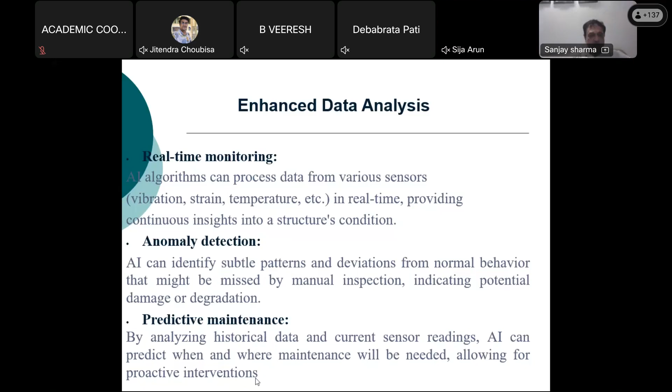So basically what's important is that you collect real-time data, having some mechanism to monitor it regularly. Then anomaly detection means analyzing whatever data is being collected to see what is happening. This is important because if you're carrying out manual inspection, issues may get missed. If we have that pattern coming to us, all that data, we can analyze it, and reduction of that particular cause is important. It will help in planning preventive or predictive maintenance - that is where this particular thing is useful.

So we want that AI tools can recognize complex patterns, how the data acquired is correlated, and how you can use it for accurate assessment of the health of a structure. Human error is always there, so if we get automated data, it minimizes the risk of human error in manual inspection, increasing the reliability of structural health monitoring systems. It also acts as an early warning system - whatever data you're getting, you can use it to get a warning of structure failure.

Then we can optimize maintenance plans if carried out properly, which will reduce unnecessary inspections and time-to-time repairs, leading to extended lifespan of the building or structure. It will minimize the need for costly replacements and reduce downtime. So any disruptions, like closing of a bridge or a traffic closure, can be avoided if you already have that sort of system in place.

Nowadays it is very important to have some early warning system, as we are seeing because of rains, so many damages occurring in hills and elsewhere. If we can get some sort of information because there's a sudden cloudburst causing flooding, we can have a warning system in place so we can plan well in advance - that's what weather prediction gives us. That is what we need for our structures also.

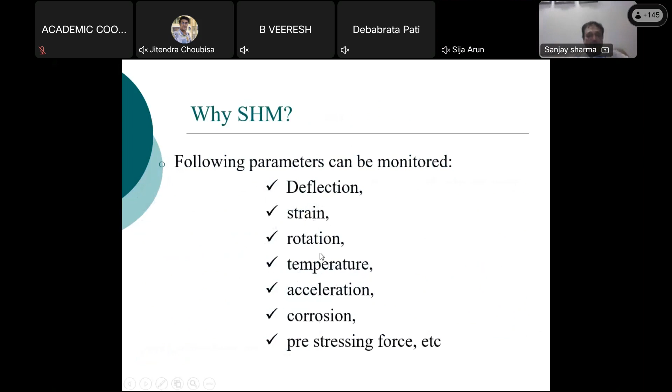So we can understand that if we can use this AI application in structural health monitoring, it is very useful to us. And what parameters do we need to monitor? Deflection, strain, rotation, temperature, acceleration, corrosion, pre-stressing force, etc. Those things are required, and you can see that the most efficient system is the one which is applicable for aircrafts, etc.

I think this is the most advanced system where we are using this monitoring. If you compare it with your human body, we have our sensory systems, all the data is processed in our brain, and the brain then tells us this needs to be done. Similarly, if we have sensors or a data acquisition system installed, that will lead to better processing of the data collected, and it will help us in that way.

So basically we can say that SHM is the process of implementing a damage detection strategy for engineering infrastructure. We refer to it as a structural health monitoring system. Why this information? We need to have the answer: is the infrastructure performing as expected? We need to find out whether performance-wise it is giving that or something is happening, what could change with time, whether your dam, bridge or building is performing as expected.

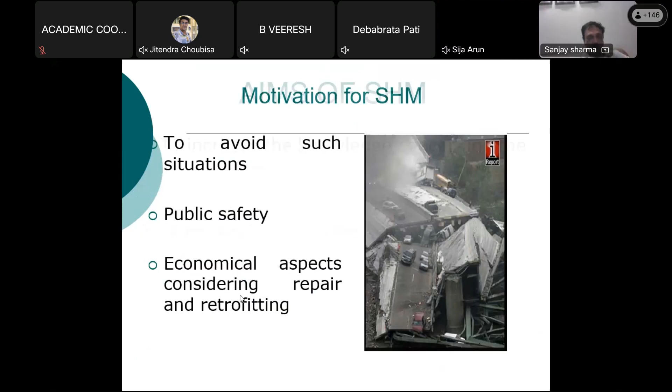If we don't allow the structure to go beyond repair, we can have an economical repair and retrofitting system if we install these sensors to monitor the structure. The aims we have already discussed: to increase knowledge concerning real structure behavior, to control the construction process, to enhance maintenance activities, to increase safety during service, and to evaluate the structural condition after events such as earthquakes, unexpected weather conditions or terrorist attacks.

You can use it in tall buildings, bridges, tunnels, aerospace, geostructures, steel structures, wind energy, etc. In many areas you can use these AI techniques to get the data. Our ultimate goal of having structural health monitoring and AI application is predictable performance. First we identify the performance issues, like load carrying capacity, type of cracks occurring, strength parameters, or density.

Maybe corrosion is one particular one. Identify the performance issue, then see what is more important to monitor. Then decide how this data will be used, plan and build the instrumentation and data collection system, configure data with respect to management tools, evaluate and make decisions based on the data obtained. This is what we need to follow in any AI application technique, and the same is true in structural health monitoring.

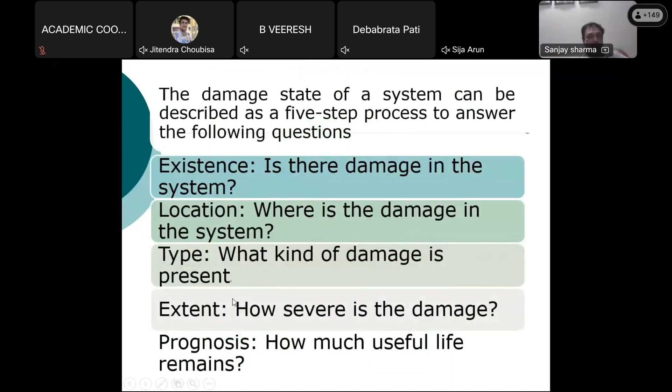So that is what that is. So the damage state of a system you have to describe: existence, whether damage really exists; location, where it is located; what type of damage; how severe is the damage; and how much useful life remains with that damage.

So you can classify based on the level: level 1, level 2, level 3, level 4, level 5. Level 4 is basically prediction of the remaining service life, which is important, with respect to data obtained from the application. And then you can see that maybe self-healing structures are there already also.

So in any structural health monitoring system, the various elements: you have a structure, you have appropriate types of sensors installed, maybe strain gauges, embedded strain gauges, or surface gauges, then you need to have a data acquisition system also. The data the sensors are collecting is given to the data acquisition system, and then you manage that data with any software available, and then you carry out the interpretation and diagnosis.

So that will give you basically what type of system is there, whether it is a load bearing structure, a suspension bridge, and other things, and the structure model update. So whatever the structure model, you put those things into your model, carry out the assessment, see what is happening, and whether retrofitting is required or not, you can plan with that.

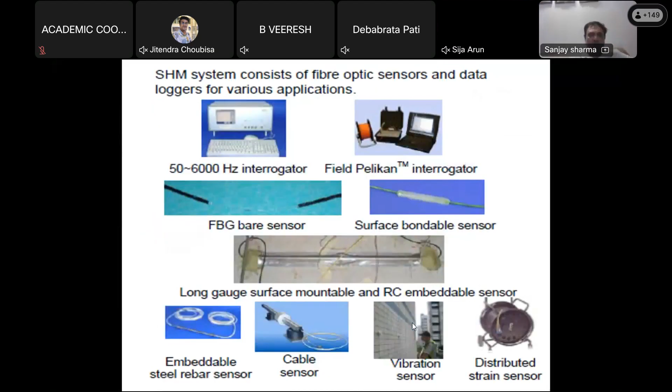So you have to plan the location also, where to install those systems. What to monitor, that you have to decide, and location-wise it is also important where you are going to install, where is the most critical location, and then that data is to be obtained. So where you are going to install your actuators, sensors, etc. also becomes known.

So you can see global vibration-based structural damage detection. Basically it can be used to detect the damage throughout the whole structure, especially large and complicated structures. So then you feed that data into the model and see what changes are occurring in the structural systems.

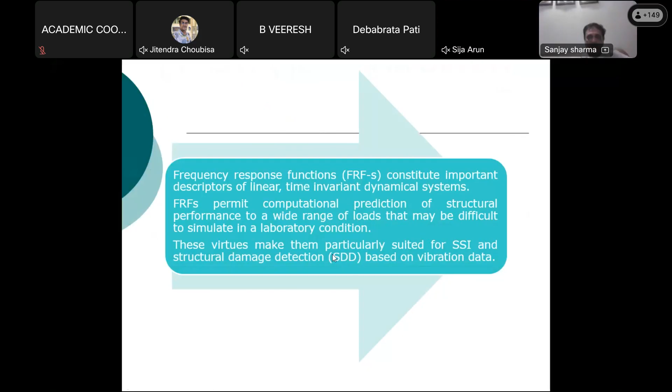And then the frequency response method can also be used. Frequency response is defined as the magnitude and phase difference between input and the output signals. And okay, I'm going back.

So basically, either based on vibration or based on your frequency response, you can decide that you have to go for the structural health system, and that means you are monitoring the various key structural parameters and also the environmental parameters on a continuous basis in real time. This will help you provide safety, which is very important, and that's why I've written safety, safety, and safety. Then it provides your maintenance and rehabilitation, improves design guidelines, and gives a proper disaster mitigation plan also.

So the pattern of any structural monitoring system will consist of your operational evaluation and data acquisition, and sometimes you get data which may not be useful, so you have to see how to extract the useful data and how to clean that particular data. Your useful data has to be extracted, compressed, and then used in some statistical model. Maybe you can use ANN techniques, or MATLAB, or maybe SPSS, to analyze that particular data. So all the data collected needs to be properly analyzed using the proper type of system.

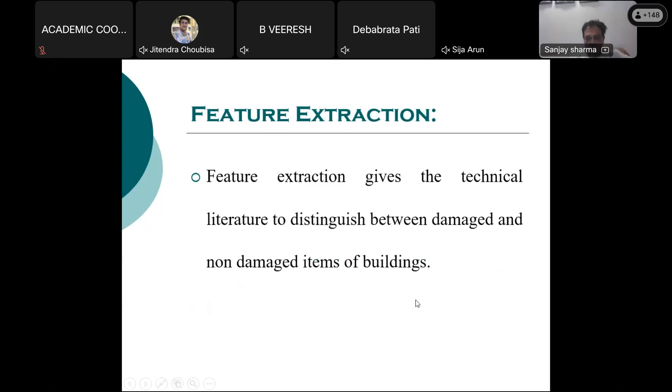So that particular feature should enable you to distinguish between damaged and non-damaged items of a structure, because only then will the data be useful for the model. So the proper statistical model also has to be selected by you for carrying out that particular analysis.

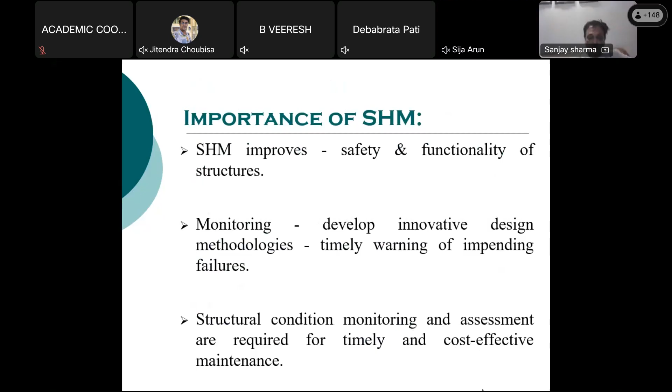So basically SHM improves the safety and functionality of the structure, provides you proper timely warning to prevent future failures, and provides a tool where you may not have to go for time-to-time costly inspections of the building. Cost-wise, the initial cost of sensor installation is high, but otherwise it provides good value. An example is 40% saving on aircraft inspection. Also autonomous damage detection for disasters.

So now we understand that we have to plan a very good health monitoring system for our structures, to identify what is happening and what the components are, and for that you require the knowledge. So it is needed.

Otherwise, our present technique is visual inspection by trained persons, who carry non-destructive testing tools, etc. We cannot deny their value, but once we are getting this, we have to use those things also. Or if we get data from non-destructive testing techniques, we can train that data to give more information about the structure. Sometimes you may have to carry out certain tests on samples also. So the routine type of system is very tedious and very risky. It is not inexpensive either.

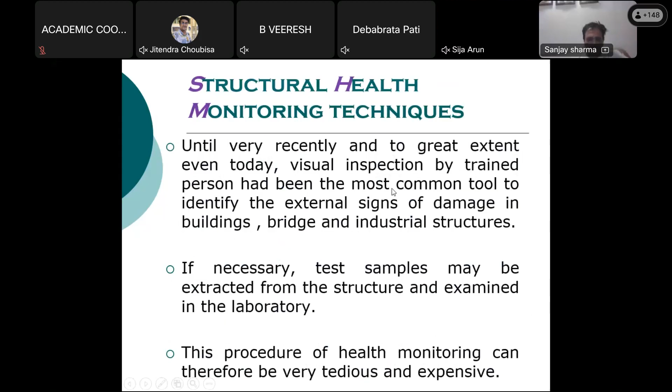And you see that, application-wise, aerospace structures are very common. In civil structures, we are using it in bridges, dams, skyscrapers, etc. Mechanical systems like your bearings, engines, etc. Nowadays vehicles are getting fitted with that sort of information, where we see your oil, your braking system, or your tire pressure, etc. That is what you are providing those sensors for basically. That is what we mean in terms of monitoring a building.

Also, we need to think about what type of sensor can be installed, in health also. AI applications are now also there. So already we said, component-wise, what we require, what we don't require. Maybe we can analyze one particular component of a structure, or a combination of these. Foundation, basement, column, beam, slab, etc., can be used for this. Okay.

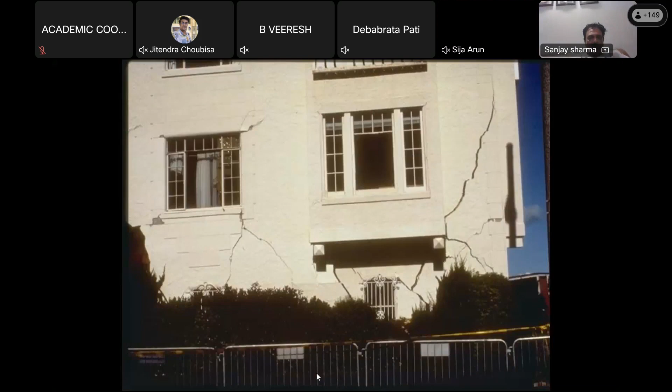So damages can occur due to mismanagement in condition, lack of quality control, temperature conditions, etc. And this is an earthquake-affected building. Damages will result in changes in geometric property, boundary condition, system connectivity. So if we are able to get the data through an application, through a sensor, only then can we properly analyze that particular structure. Otherwise, it may not be possible to know how the structure may perform after such damages.

So what type of sensor you are planning is also very important. Basically you should select a sensor which is sensitive to the measured properties. Whatever property you want to measure, it should give that, and it should be insensitive to any other property likely to be encountered in its application that does not influence the measured property.

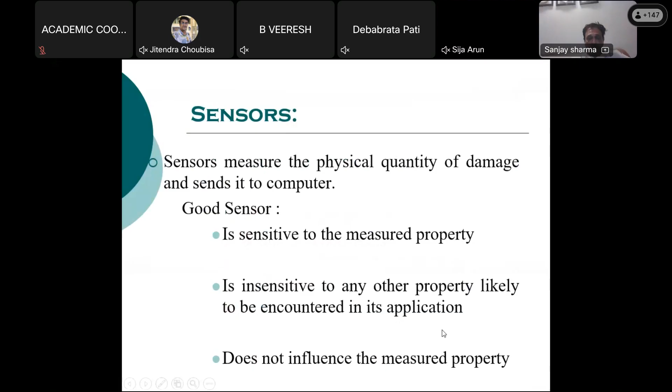Okay, the data acquisition system also. Here it is the process of sampling signals and converting the resulting samples into digital numerical values. So basically it will depend upon your sensor; analog-to-digital converters, etc., are to be used. So the data management system manages the data obtained from the sensor, and then it transfers the data to a system which helps in predicting the failures of a structure.

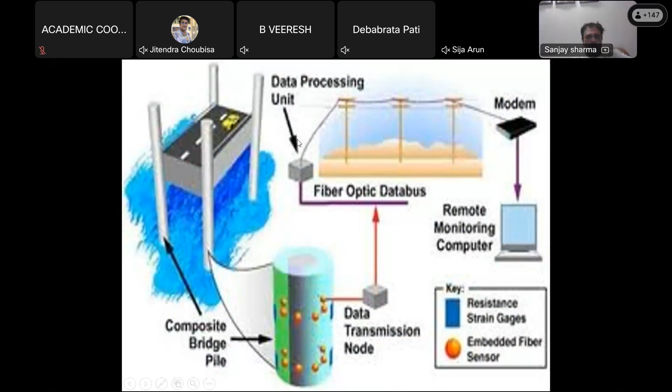So for that, you need to have fiber optic cables, a data processing unit, a modem, your remote monitoring computer, and data transfer modules, and finally you provide those composite piles in the pillars or wherever you want to install that sensor in the system.

So basically, for AI applications, machine learning techniques are important. Whatever data we are getting is used through supervised learning, unsupervised learning, and reinforcement learning. You have to understand that and classify that particular data. Maybe images are there, so image classification should be there. Then diagnosis should be carried out, and carry out regression analysis, prediction, and processing. So basically you train that particular data using some sort of software, as I said.

And sometimes it is unsupervised learning also. You can say dimensionality reduction has taken place, damage has come, and then that particular data should be used to acquire the skills, to take real-time decisions for the future. So that is what you have: input, application of ML, output, and then prediction, and remove any false prediction and provide feedback. So unnecessary data should be removed, basically.

One example like this: we conducted air quality monitoring, say from 2019 to 2023, to make a predictive model for air quality parameters in future. But in between there was the COVID period, so there was no air pollution and all that, and that was giving wrong data.

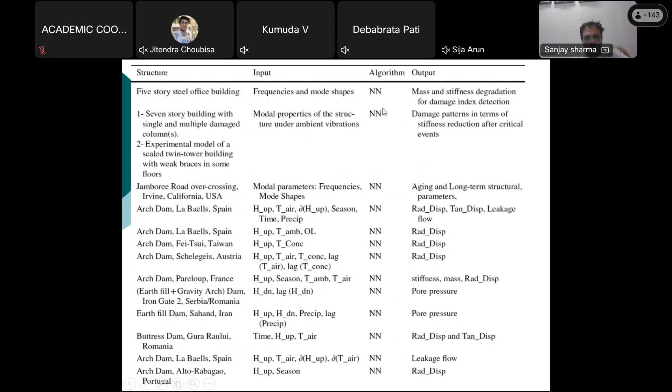These are the different sorts of structures for which I have collected this data from the literature, etc. It is only showing that different algorithms are there. Depending upon the input, you have to decide. Once you have decided what type of structure you are going to monitor, then what input you require, then you decide the algorithm to be used, and get the output according to that. That is the importance of these slides. Different models and algorithms have been provided.

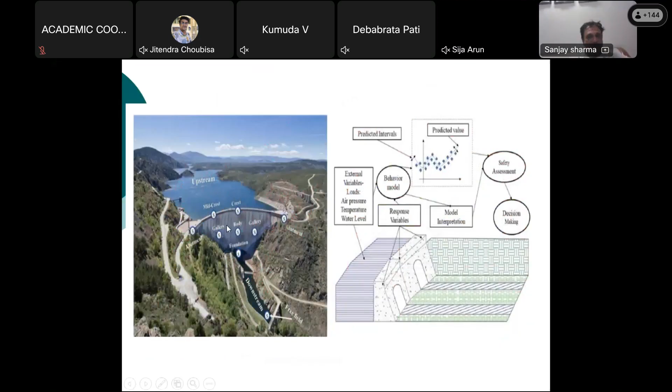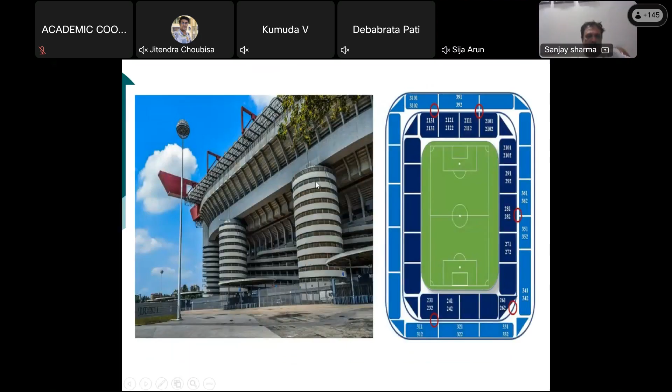So this is the sensor installed here for determining whether some ice is there, some mud is there, cracks are there, or delamination has occurred. That sort of thing can be utilized by installing the particular sensor. This is one stadium in which all the sensors have been installed, and monitoring is being done on a regular basis.

So structural monitoring, structural diagnosis is important. This is to be done based on the information gathered from your data system, and then carrying out the diagnosis of the problem. We need to confirm that, whatever we find, maybe NDT techniques or other methods have to be applied there also. This visual inspection and data collection through visual inspection or NDT technique is part of this process. So this is one diagnosis feature for condensation.

Where you need to provide whether mold growth is there or absence of salt is there, what is the wetness on the surface. We don't have any defined margins for that dampness and wetness, etc. It's more prominent where water vapors are generated.

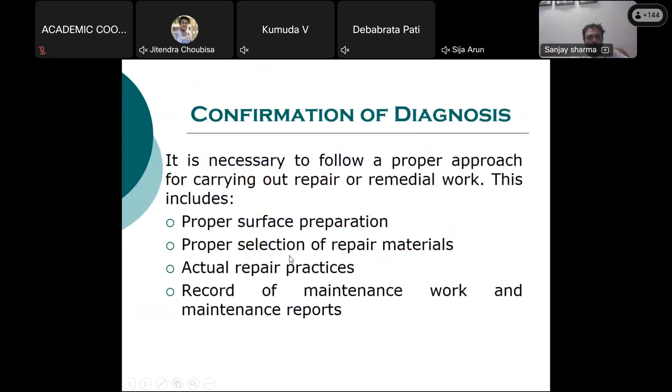For that you require a proper approach: surface preparation, proper type of material selection, actual repair techniques, etc. What you need to identify here is the moisture level, so install moisture sensitive sensors there. Depending upon your objective, you need to decide what type of sensor you are going to install.

So we have already discussed this. Now we need to understand what to monitor, and if we are going to install something, we must have understanding of what is happening and why. The life of a building or any structure will depend upon type of construction, quality of construction, service loads coming, structural deficiencies, inbuilt construction deficiencies, exposure conditions, calamities, and maintenance, etc.

So nowadays we are using that particular thing. We are getting queries, even AICTE, when we put our approval process every year, we put our building safety certificate also. So if we have that sort of regular monitoring, nowadays what we do is go there for visual inspection, NDT techniques, and based on the result obtained, we give the verdict that the building is safe with respect to the construction carried out in that particular year, because many of the codal conditions have changed.

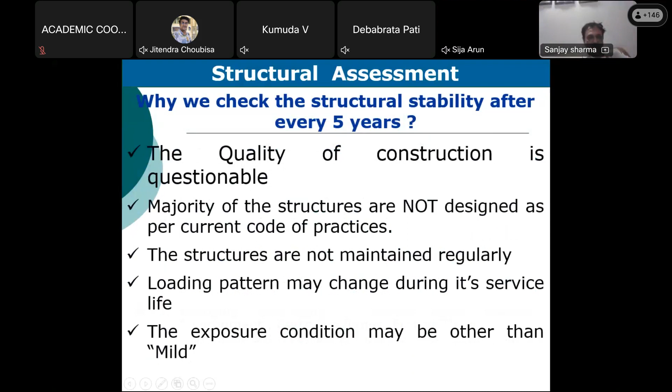Old buildings used M15 grade of concrete, now the minimum grade is M20 and M25. So we have to see that. Many times we do that also. For different purposes we require monitoring and stability evaluation etc. to find out this thing.

Then preventive maintenance is important because a stitch in time saves nine. So basically it is important.

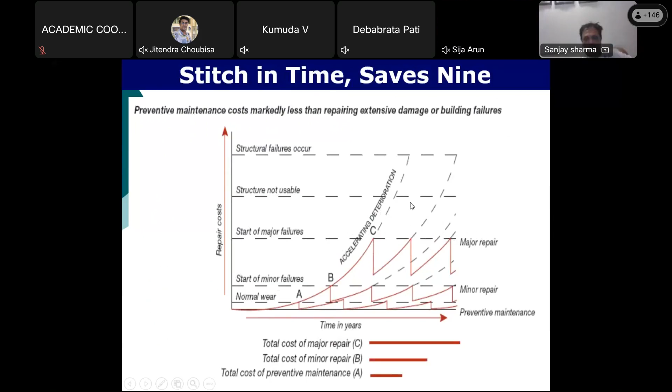So whenever we say what type of data is required nowadays for a building, we say architectural drawing, structural drawing, geotechnical investigation, foundation details. And you see that after going there, you find nothing is available on that particular list. You don't have any sort of data, then you have to generate that data.

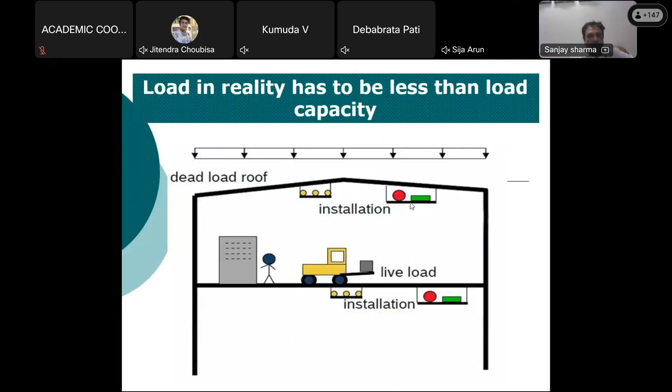So then you go for the type of structure, frame, steel, composite structures. Then what is the load assessment, what type of loads have been put on the building. Many times some changes have taken place, like an additional floor, additional false ceiling, etc. is provided later on in a particular building. Many times design assumptions are different from what is actually at the site.

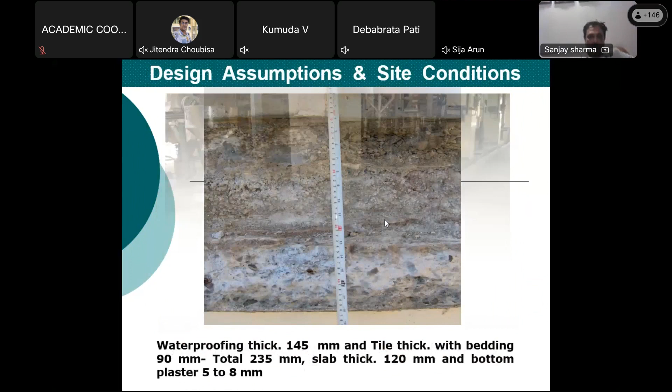So basically that is what is important from that point of view. Design assumptions are different, actual work done is different, in terms of waterproofing, in terms of flooring, in terms of plaster work, etc. Additionally, many times these things have been raised, and later on a lot of equipment has been added on that particular building. Regarding this particular building we tested,

it was some Godrej building most probably. They installed additional equipment on the surface of the top, like additional tanks and all that. This caused, without carrying out analysis, without carrying out anything, they installed it, and it caused a lot of cracking into the lower beams, slabs, etc.

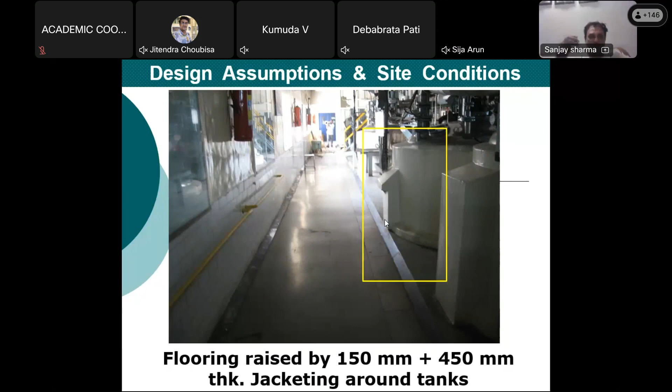So then came the question, what is the present condition. We tested the present condition, made a drawing and carried out analysis with the additional loading, and found out what is the deficiency. Had they installed some sort of sensor, they would have well in advance known what is happening in that particular thing. So this is what happens with putting additional tanks on the top. Nowadays we are also putting gensets on top of the building.

Alterations are carried out, just showing what sort of common things happen. Many alterations are carried out, and some additions are made. Sometimes your columns are punctured, sometimes you do additional balconies, you provide additional surface.

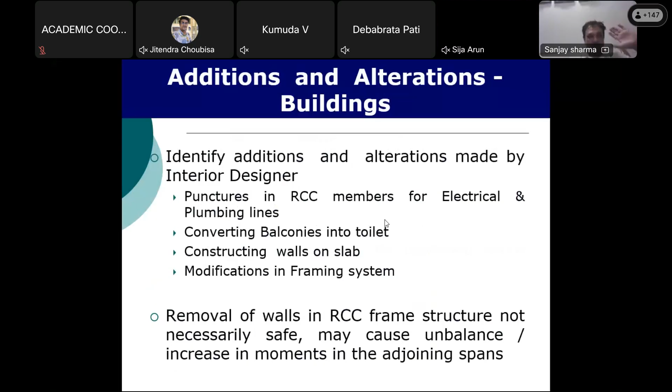This is shown in a small building, but if it is happening in a bigger building without any monitoring, you can see that in a multi-story building, additional walls are put in without any knowledge of the consequences.

There was a 6-story building of Airtel. They were using it as office space earlier, but afterward decided to use it as store space. They stored data of their customers in files and put lots of racks, and that collapsed. Basically the column failed, and then rehabilitation was carried out without strengthening the columns. So again they put load on it, and again it failed. That is what basically happens.

So if we don't carry out things properly, it happens again, and then cutting the slabs for this purpose causes similar problems.

Recently a building collapsed in the main sector, sector 17, a five-story building. It collapsed one day suddenly. Fortunately there was no one inside, it was a holiday, so no one was around, and it collapsed in the morning. They were carrying out repair and rehabilitation without any data collected, and they damaged the main columns, and one day the building suddenly collapsed and fell down. So that sort of thing happens.

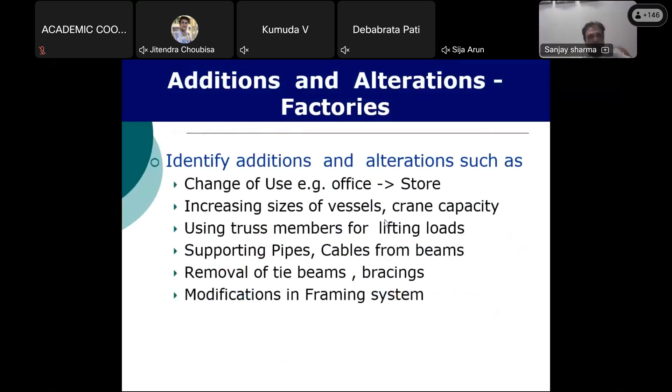This is again something we do very commonly: installation of loads, where to install, identifying the right location. This particular piece has been cut out to make this opening. This happens in many cases. If we have a proper monitoring system, well and good, we can get the data in time. But if we don't have that, this will cause a lot of problems.

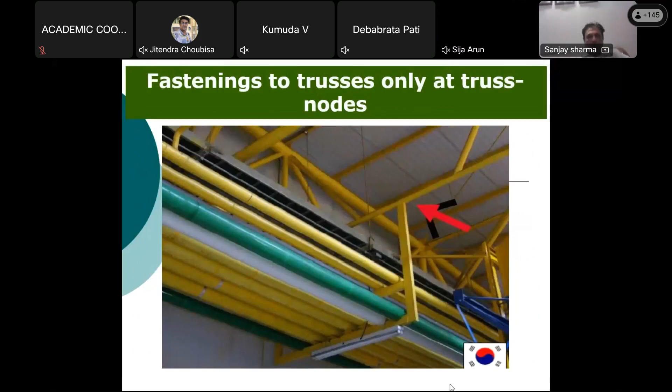This is again deformation in frames. This is one structure with a column cut, and again the same thing, you can see that in the middle it has been cut and one member removed. Fastening should be done at the nodes, not in between. A pipeline has been installed, one duct provided by damaging the structure.

Or a beam has already sagged, a deflected beam. Then you need to get information about the type of crack. Cracks may be structural cracks or non-structural cracks, due to incorrect design, faulty construction, overloading, incorrect detailing, foundation movements, and many such things.

Mostly non-structural cracks are due to moisture changes and thermal movements. But in any case, these non-structural cracks, if not attended to, get converted into structural cracks. So it is important to monitor. You cannot carry out inspections only after every 4 or 5 years. But if you have a regular monitoring system, then it's fine, especially for big buildings.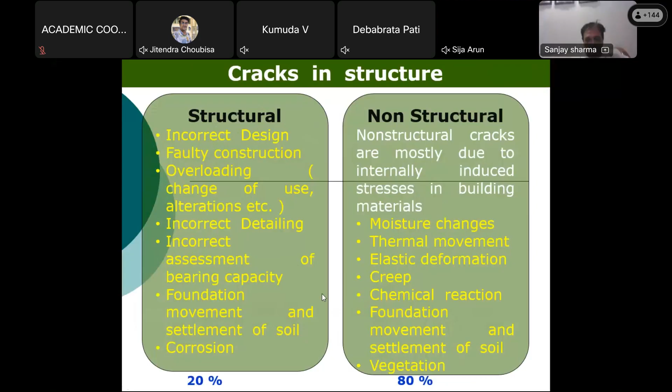You can see this pattern of crack is important. So you understand what type of cracks are there, and then you need to select the sensor for monitoring this particular crack. Selecting a sensor for the proper type of crack: if it is a shear crack, a shear-cum-flexure crack, or a flexure crack in the slab, decide what parameter you want to monitor, then look at flexure cracks in a slab, etc.

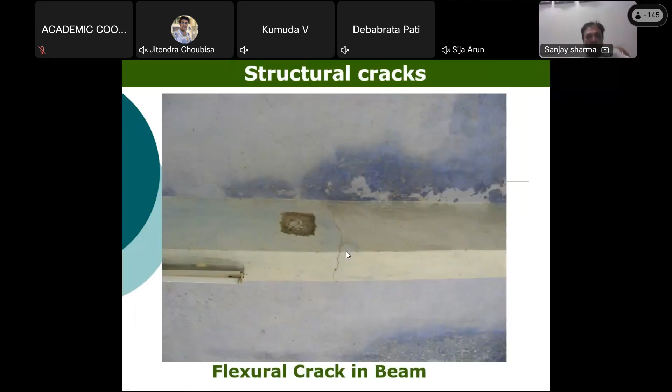Then the beam, same thing. Similarly, flexure crack in column, pattern of crack. Visual inspection is important, but at the same time, if you are able to get sensors which provide the required information, it will be helpful. Similarly, tension cracks, compression cracks, installation at a proper location, and this is foundation settlement cracks.

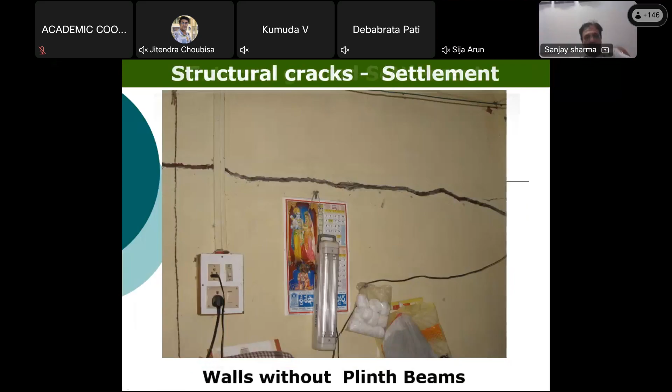Okay, this is happening. These types of cracks are there. This is foundation settlement again, shown by floor settlement, you can say. It's happening there also. This is again the floor settlement.

Corrosion monitoring. So why it is happening, how it is happening, you need to understand, and that type of thing you first have to understand. Okay, what you are going to monitor. Maybe you can monitor one thing, or you can monitor all the parameters together.

So for that, yes, we do have NDT techniques. Maybe I can show that, and that is a part of this presentation also. Quickly we will go through that.

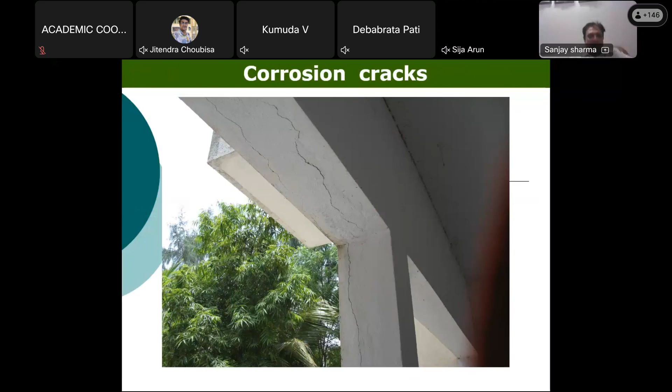But yes, I think we need to understand, and then whatever data we are getting is corrosion cracks, and that corrosion occurs due to many reasons. Because carbonation is one, chloride ingress is another. So there are two causes of corrosion.

It is a sudden fall from the top, like this. So this is the chloride, this thing. This is again corrosion, different types of things I have shown here. So particularly non-structural members are more prone to corrosion.

Lifting cracks, stress cracks. Many prefabricated systems are there. Corrosion in steel or this thing is there. So pitting is a very important thing. Scaling of that particular thing. So basically, you have to look.

That is to decide about this thing - okay, what type of section is there, how it is, where corrosion is occurring. So that thing, connections etc., need to be important. And then these are the shrinkage cracks, if they occur, why it is happening.

You know, this is that chloride, due to chloride, this thing.

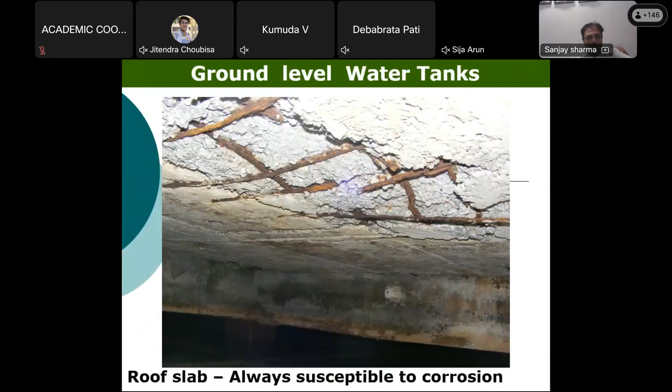I think AI techniques, though important, at the same time, how and for what purpose these AI techniques, for what to monitor, is very very important also. Only then will you be able to apply those AI techniques and carry out the data analysis properly. It is important that you understand, from that point of view, what type of failure, what type of defects can occur in a building.

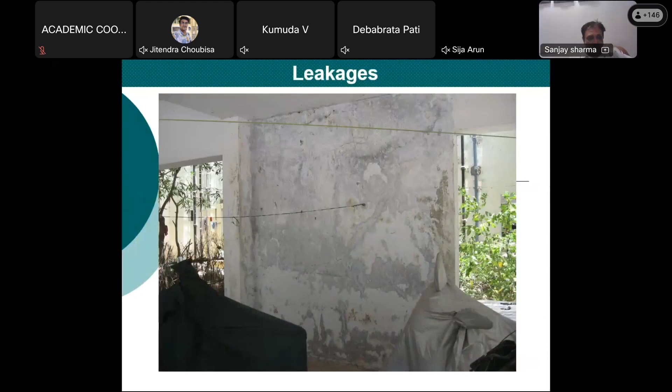Leakages is one thing. Okay, this is one of the major issues, and most of the issues, 80% of problems, are due to leakages. Okay, so this is again a very common sort of thing.

Okay. Tile terracing, plumbing wrongly carried out, and poor maintenance again. The rainwater pipe is blocked, is clogged, etc. So plumbing, drainage problems are there. This type of thing is very very common.

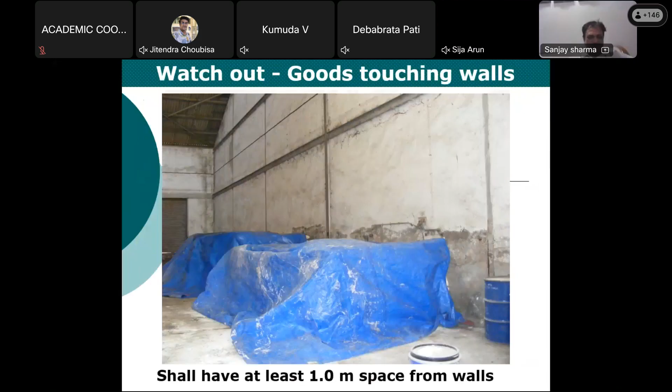And if it is happening in an inaccessible area where nothing is noticed due to this, what is going to happen to your structure if you're not monitoring it properly? So monitoring through an application is very very important, because if you don't monitor, otherwise everything... as I said, vibration is an important part.

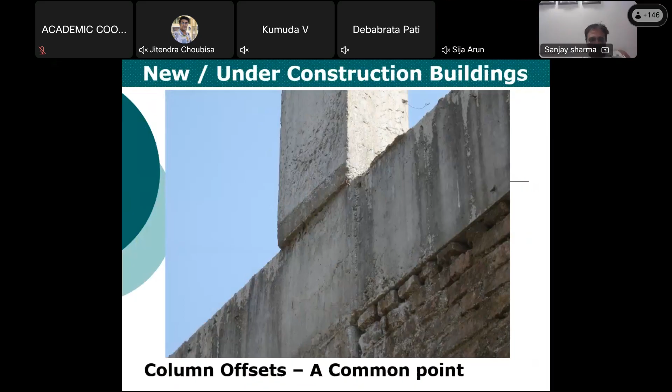Vibration etc. This is again a different type of concrete, and poor quality of concrete in one particular lift is noticed. Offsetting of the column. Okay, in this particular building, they found that the plinth beam was cast, and later on they found that they had reduced the size, then bent the column and the steel, and constructed by providing an offset. So basically that would later lead to causing eccentricity, fluctuating in that particular thing.

This is the cold joints again. Any cold joint is there, so what is happening may not be always visible. Doubtful concrete, how to monitor it, how to handle this thing, it is important. Okay, strength parameter is again very very important, and then you have to decide it.

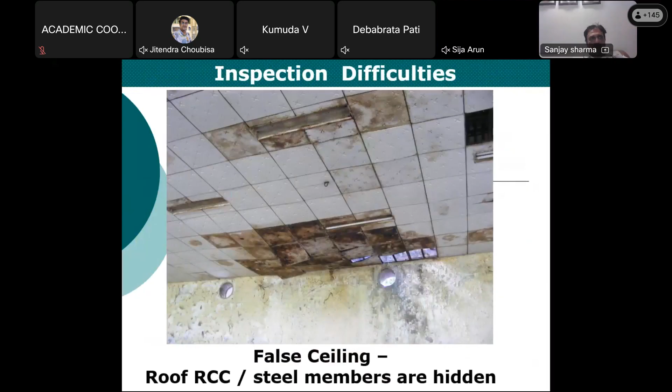This type of situations I am just showing, and okay, we want to monitor these situations, so you see what could be the issue - so inspections are difficult to carry out. This is a structure that is sometimes statically unstable type of structure. Structure collapses - I'm just looking at this thing.

So that is why, okay, we need to give that structural safety. No, that may not always be possible. If it is a very tall building, or a bridge is there. So no doubt we are carrying out some visual inspection also, but nowadays, if you have seen that bridge on the Chenab, this is the highest bridge in the world now.

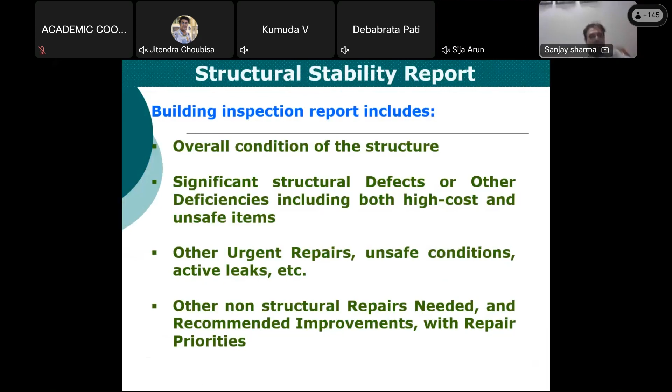How to monitor that? Sensors have been installed there, so they are giving all the data about the condition of that particular thing, and data is being analyzed. If anything happens, we can take the preventive action in advance. So that sort of thing is basically important.

So one part is your visual inspection. Once you carry out visual inspection, you will be able to understand what is important in this particular building to monitor further. And then for that you can use the appropriate type of sensor. No doubt nowadays, if tall buildings are there, you provide a lot of sensors, basically to select in advance what sensors, what data you are going to add.

But if it's an existing building, you have to decide for its regular monitoring what type of defect may be occurring in this particular building and what type of data I need to collect, and for that you have to select the appropriate sensors. So you have to see what is visible, what is non-visible, what part is accessible, what part is not accessible, so all things are to be well planned and well taken.

And then the next part is many times your NDT techniques. For NDT techniques, we need to apply an NDT model, because with NDT you get a lot of data with respect to, say, ultrasonic pulse velocity used in a structure. You have collected a lot of data, and then how to interpret that data is again maybe visual. But can we make some sort of machine learning model to predict the information obtained from our NDT testing? That is important there also.

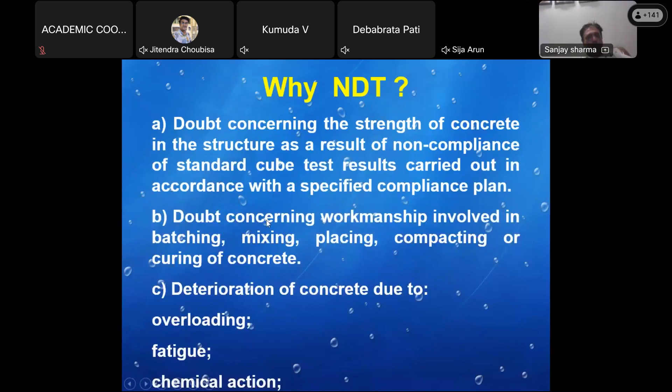So we need to understand what type of NDT techniques are there and what type of information we are getting from NDT. So basically we are using these NDT techniques for strength measurement, for any lack in workmanship, for deterioration due to overloading, fatigue, chemical action, etc., and fire, explosion, weathering, and to ascertain the present acceptable level of the concrete strength, whether it is as per the designed loading, or what is the actual loading coming on that particular structure.

For the time being, we believe only the strength data obtained from our cube strength. But for an old structure, it is not possible. For a new structure, yes, possible, but it may not be true for the new structure also. Many times the cube may be okay, because it is cast in a very controlled condition, and at the site the conditions are different. Temperature may be different, your vibration may be different.

We tested one bridge. It was a railway bridge, a prestressed bridge, and the cube testing report was excellent, but at the actual site there was a lot of honeycombing, because they used the surface vibrator. It was a prestressed box girder, about 22-meter length, 7-meter height, and they cast it in a single go, and it had a lot of honeycombing. You could take out the aggregate by hand only, that sort of honeycombing was there.

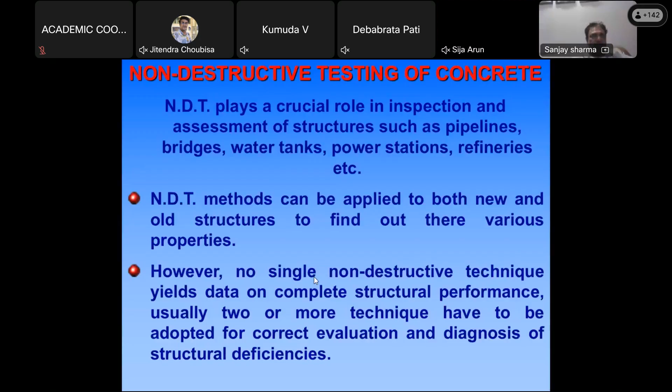So these NDT techniques, you can use them for quality control, for validation of structure, for estimating the capacity and strength of a structure, and identification of the cause of damage. And among NDT techniques, if you have this acoustic emission instrument, basically you put the sensors, and any sort of vibration is picked up by those sensors, and that is converted into signals. That is what I say, that even your NDT technique is one particular type of sensor basically, which can be used.

Similarly, nowadays we may have some sort of installed sensors, like we are putting the vibration sensors regularly, instead of carrying out, say, UPV in a single way. Just giving you an example, after we set that particular UPV transmission system, after every 24 hours it is recording, and one particular velocity we are determining. So now we can plan that and think of that type of sensor also. And yes, this can be done.

So basically, you can use them for material properties, for determining extent of damage, assessment of safety and serviceability, formulating remedial and preventive measures, determining the position and quantity of the reinforcement, etc. So all those things. So quickly we will go through that.

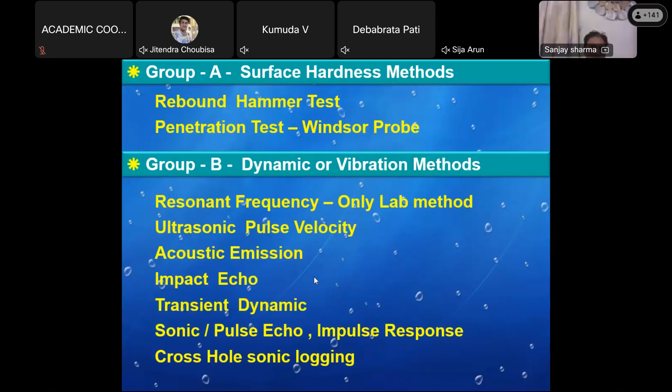So we can say these are nothing but instruments having inbuilt sensors. So you monitor through them, or you can have regular monitoring by installing such sensors into your system. But you get the data through them. So what is happening to the reinforcement, how corrosion is occurring, is important.

So you have the half cell potentiometer and electrical resistivity, which are based on electrical methods. Then electromagnetic methods, where you have X-ray and gamma ray, but not very commonly used. There is also air and water permeability, Autoclam. And there are partially destructive tests: pull out, pull off, break off, core cutting, etc. And chemical tests, crack measurement tests. So if you want to determine compressive strength, you have to find out what type of system you are going to use.

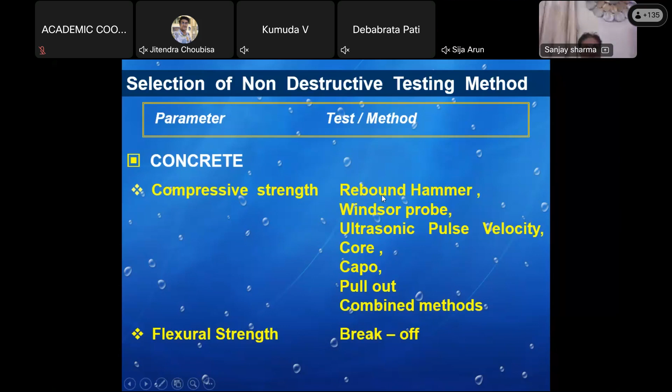So in structural health monitoring, you are only finding out that some crack is happening, what is the width of that crack, what is the depth of that crack, but may not be able to say why this crack is happening. So that you have to further analyze, and for that you require the strength, how much is the concrete strength there. So for that you may use some methods. For flexural strength, the break off test; for direct tensile strength, the pull off test; for concrete quality, ultrasonic pulse velocity, pulse echo, etc.

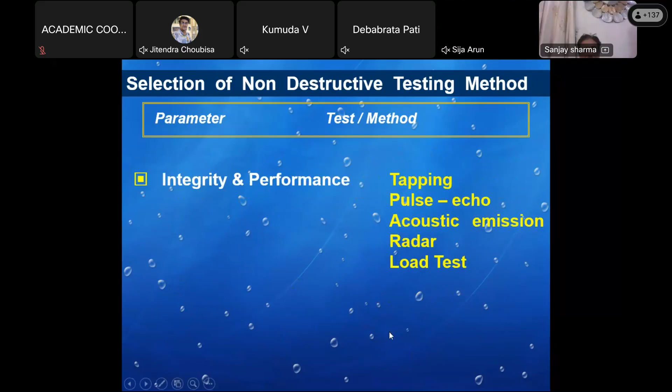And for damage due to fire, blast, earthquake, you can use the rebound hammer, ultrasonic pulse velocity, acoustic emission, etc. For cracks and delamination, you can use ultrasonic pulse velocity, pile integrity, pulse echo. Then for steel, you need to know location, cover, size, corrosion, condition, and for integrity, pulse echo, acoustic emission, load tests, etc.

This is just a quick go-through. These are rebound hammer tests. Most of you may have used them also to determine the in situ strength. This is again a good and quick method to find out the in situ strength. There is no other way; basically, you have to cut cores of the existing structure. But then how to use the data, how much data is useful, maybe for a separate discussion.

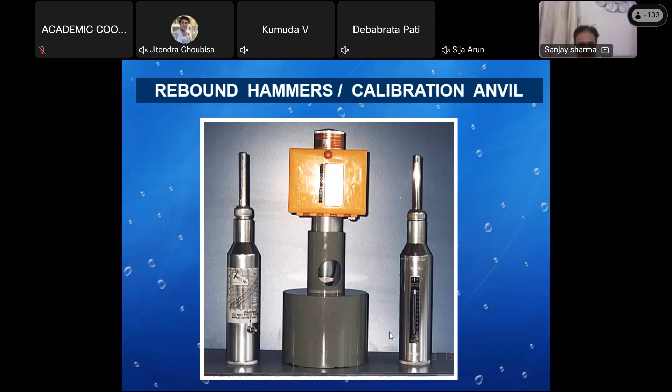I will say that we need to develop such type of an algorithm for analyzing the data given by the rebound hammer to make it more reliable data, or whether regular monitoring can be done. So that is basically how we can use this rebound hammer to find out the strength.

And nowadays you have these digital hammers, which are giving you direct strength. They say how many readings are to be taken, how the average is to be taken, what type of readings are to be discarded, and then based on that you can predict the strength. So the rebound hammer test can be used to predict the in situ strength of an existing structure.

But it has a limitation: it is giving you information about only 25 to 50 mm of concrete, and we assume that if the cover is okay, the inside is okay. The digital type of hammer is again different. But if we want to see what is happening inside, we are using the UPV method.

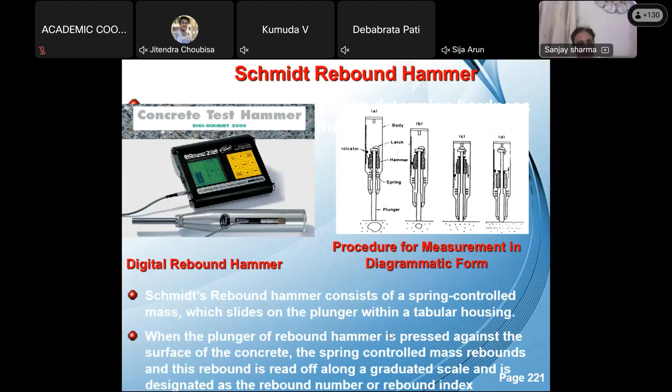This is again the method for how the rebound hammer is to be used, so not going into that. I'm only going into what systems are available with us for getting the data. So the rebound hammer is used to get the strength. Core cutting is there, CAPO is there, other methods are also there, but it is the most easy and quick method. It gives you information about the quality of the concrete also, depending upon the average rebound number. So we can use that.

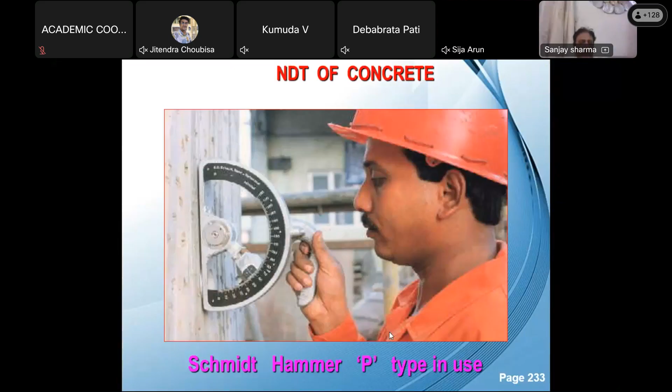So the advantages, as I said: simple, speedy, inexpensive data can be obtained, and it gives compressive strength. Accuracy, as the code says, is plus or minus 15% to 25%. This is a Windsor probe. Again, based on the hardness, you fire pellets, basically screws, into the concrete, and depending upon the penetration of these screws through this gun, it will tell you the strength of that particular concrete. So it is again a good method.

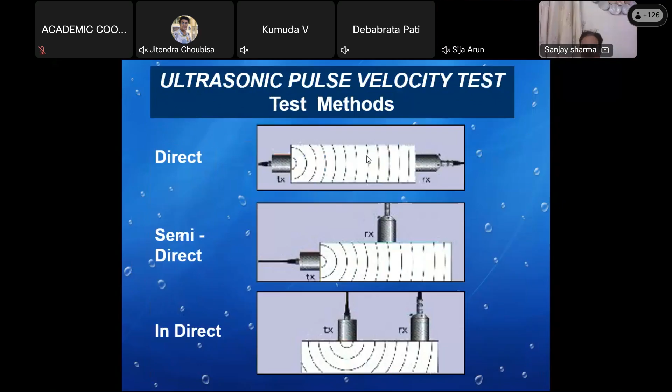This is the UPV. The previous one gives information of the surface; UPV tells you whether uniformity is there through the concrete or not. It is ultrasonic pulse velocity, in which we send waves from one side to the other, through the concrete. The old code was 13311, now it is 516, and it says if the velocity is greater than 3.7 it is very good; if it is less than 3.7, you have to go for other tests. So it tells you about what is inside the concrete.

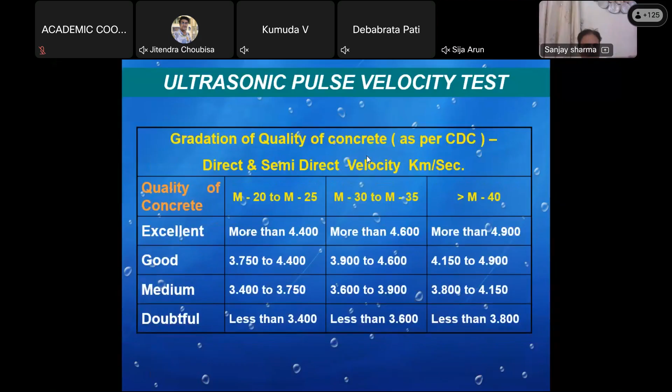UPV is one particular thing which gives you data, not regular monitoring, but after the visual inspection you can get that data, analyze it, and convert it into a prediction model of what is happening later on in the concrete. So you can use UPV for that purpose also. UPV can also be used to detect cracks in a building and the depth of the crack.

You can find out what is the depth of the crack by using this ultrasonic pulse velocity. This is again the instrument, which gives the velocity: we send the waves for a particular length, and the time taken by those waves to travel that particular length is noted, which gives us the velocity. Higher is the velocity, better is the uniformity, because these waves cannot travel through air, so if there is a gap, if there is a void, if there is a crack, they travel in another direction, so they will take a longer path.

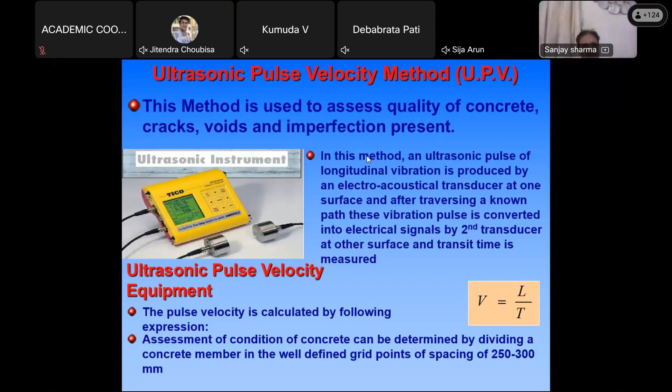So that means inside also you can find out. This is the method, this is the type of waves going inside. This is the instrument basically. Nowadays better instruments have come up. Again, UPV tells you the information about quality of the concrete and depth. Crack depth detection can also be done. Two layers can be identified by using this also.

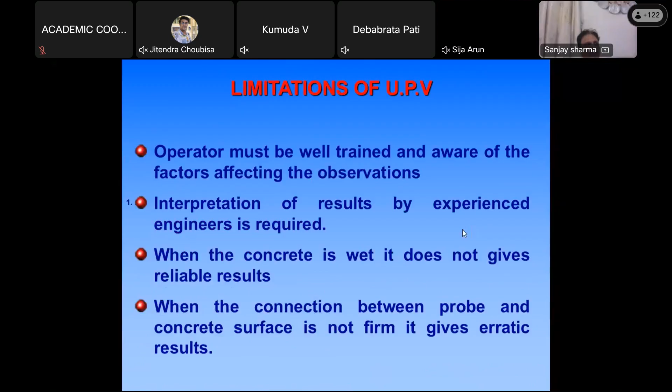So this UPV data can be collected, and that data can be trained to find out what is actually happening. If you are carrying out an inspection and after determining that something has happened, further investigation is required. For that also you can use this rebound hammer or your UPV.

One test is the pull-out test, again a better test to determine the concrete strength. Here what we do is we install this, it is called the CAPO test. They give us basically the dollies. This dolly is to be fixed inside the concrete on which the compressive strength will be determined, and this particular dolly is attached to this machine and then pulled out.

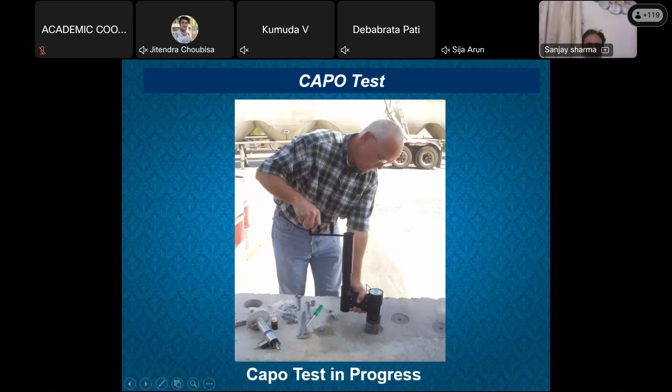How much force is required to pull out that particular dolly, whether it fails in the concrete or at the surface, will tell you the compressive strength of the concrete, which is a better test. If you compare it with the rebound hammer, it is very much close to your core test. Rebound hammer sometimes gives you high rating, but even then, if you do the rebound hammer accurately...

Once we were carrying out a test for an MES location, army location, and there was a colonel. He said, "Okay, how reliable is your rebound test?" I said, "Sir, almost 95 to 100%, if we are calibrating our system correctly." We brought a cube and he said, "Okay, take a reading on that." So we took a reading, and he put it in the CTM, and the difference was very small.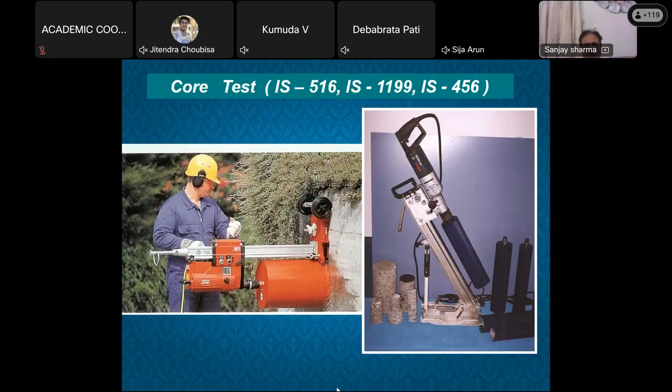So it is again almost the same. There is a dolly here which is fixed, and then force is used to pull out that dolly, and it will tell you the bond strength. Similarly, you can determine fracture strength and tensile strength also. This is a core test. Many of you know core cutting. Core cutting sometimes may not give you very accurate results. I have tried this many times, but it is not giving the correct values.

Again, with core cutting, if you are able to make some sort of AI machine learning model, it may be better, because there you will put all the conditions of the concrete, length, dia, the size of the aggregate, something like that. If you are able to put all the data, then it will give you a better result. So AI can be used for data analysis of whatever information we are collecting through our various non-destructive testing techniques also.

So core sampling and testing also can be done. IS 516 and IS 1199 and IS 456 give you this. Then another type of instrument is the ultrasonic tomography, which we call the MIRA.

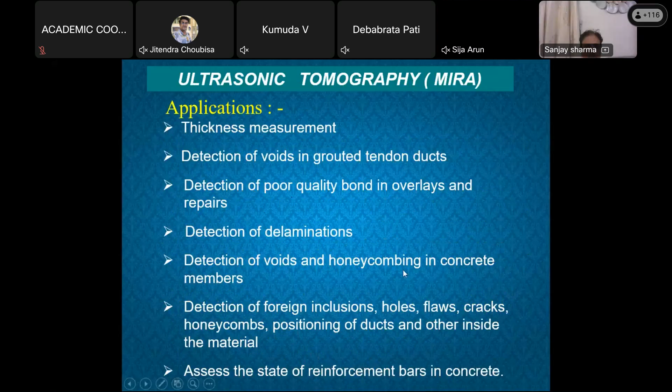So this gives you the thickness, voids, poor quality bond overlays, repairs, delaminations, honeycombing, etc. So this is what type of instrument they are. Here it is just like ultrasonic, so it has got sensors there. All the sensors are sending the waves, they are going throughout and being collected by other sensors also. You get the scans like this.

If some breakage is there, it will be reflected here. So if you see in the C scans, etc., you will be able to find out at what depth what is the problem. Okay? So that sort of information can be obtained. This is the information you can get.

Again, corrosion is one such thing. Why corrosion occurs? I'm not going into detail of that. Corrosion is there because of the carbonation process, because of chloride ingress. Carbonation changes the pH value of the concrete; it becomes acidic. As it becomes acidic, ferrous is converted into ferric, and then volumetric changes take place. So you get debonding and layering, and flakes are coming out from the reinforcement, causing that sort of a thing.

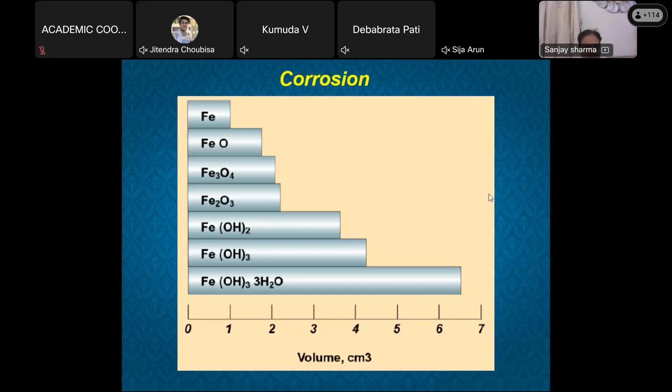We recently rehabilitated one building by using carbon fiber wrap. There also we collected the data at the site. It was a new building, and it was a design failure. We collected everything, we wrote the data on the present conditions, and provided that data into our

software, carried out analysis, and found out where the difference is between the design and the actual parameters obtained at the site, and what additional thing is required. So we repaired and strengthened those particular beams. There were problems in the beams and slabs, which we strengthened through carbon laminates. So that is one thing.

Again, some of the things we use AI techniques for is basically the data we collect. No doubt we use the standards etc. to carry out analysis, but a lot of data was there. Data is basically analyzed. So that is what we have to do for any sort of a thing.

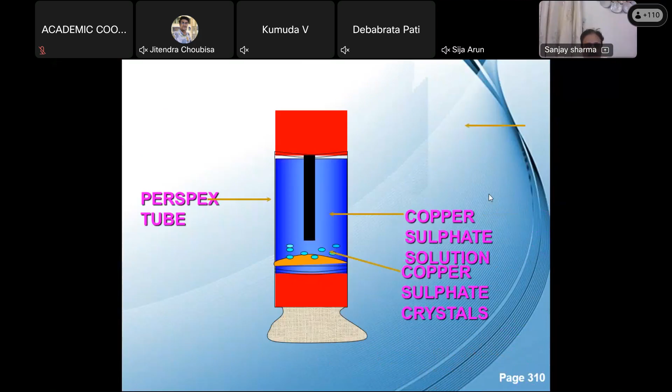So corrosion, again, determination by corrosion mapping. You can use a half cell potentiometer, which gives you this type of mapping, and find out what are the corrosion prone areas and what are the corrosion free areas. This is just how to use the half cell potentiometer. You have this sort of a system, one half cell, and the other connection you provide to the bar. The other thing is a resistivity meter.

Here you don't have to expose the bar. Give one connection to the bar, and here you just have this instrument. It measures the resistance to the flow of current in ohms, and that tells us what is the corrosion activity. So depending upon the resistivity, we are predicting the corrosion. So this is again a good instrument, an easy, quick method.

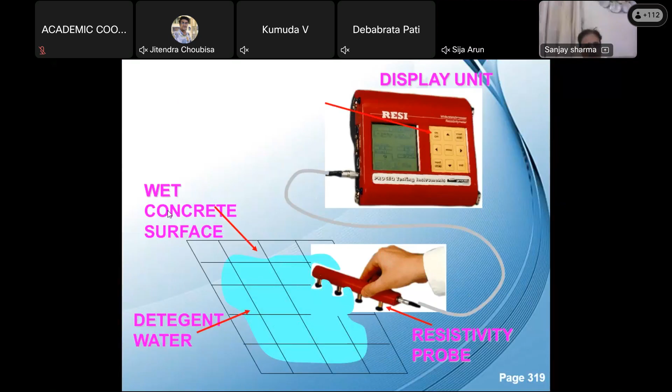We are having both the things, but we are mostly using the resistivity method, because the half cell potentiometer no doubt is giving a better, good accurate value about the probability of corrosion at a particular location of a structure. So these are the things basically.

Yes, okay. This is impact echo, particularly for pile integrity, pile testing. Here we are sending the vibration through this hammer, and these vibrations travel down. So we know what is the depth of the pile, right? If there is some imperfection in it, the vibration will come up in between.

So we have depth software. The depth software will read from what depth the wave is being reflected. So we know that if the pile is 1 meter and the wave reflects from half a meter, there is some problem at that particular location.

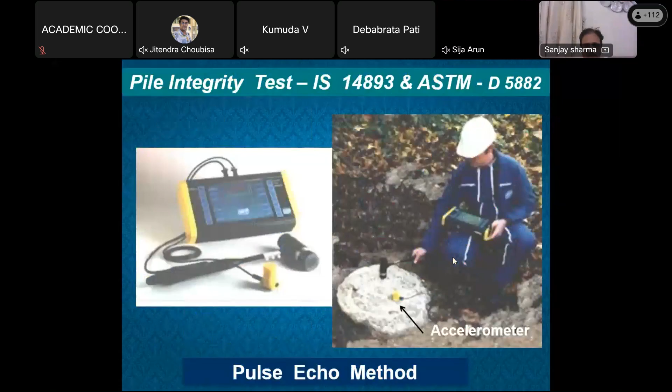So this is one method, nowadays even this is like the pulse echo method - this is how the test is being done. Another type is this, we get that particular reading in that particular system. If you are getting a good wave here, fine, but if you are getting something like a sine wave, that means there is a problem with this type of piling system. This can be identified using the pile integrity test.

You also have cross-hole logging. In this, basically what you get is the scan, C scan. Along with that you are getting all this information about what is happening at a particular point. There you are not getting where the wave is getting reflected - in this case, you are getting along the depth, at what depth, how the wave is traveling, and what is happening to that particular wave.

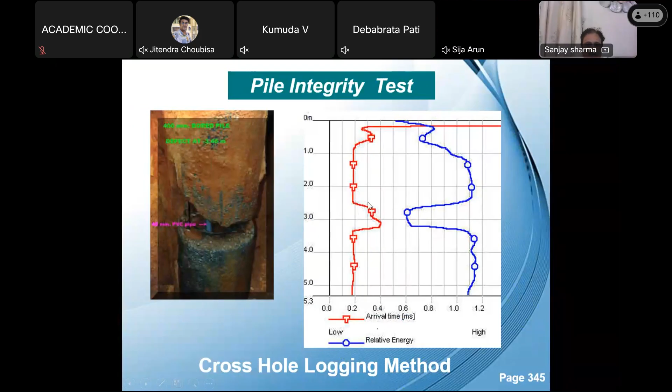Cross-hole logging, then GPR system - ground penetrating radar - these are used for finding out, basically, the type of strata, water availability, etc. So what type of water is there, what type of soil is there, that can be used for that particular system.

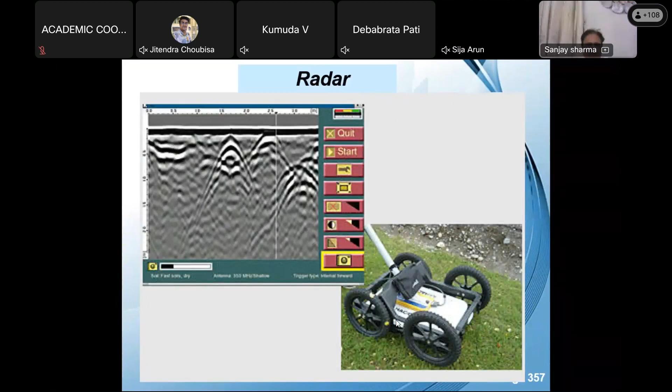When you get this type of scans, you have to interpret those scans basically to find out what is happening. You move them on the surface, and they can be used basically to find out corrosion or reduction of concrete pipelines, etc. beneath the surface. You can detect tension cables also with this. Many times slab thickness can be determined by these particular rods, pipes, cables, etc.

Then infrared thermography is the one - basically a thermal camera which you can use to find out moisture level in a particular building.

We used it in a timber building because there was a corner house in Himachal, Shimla, constructed in 1857, but one side was sinking. They were unable to fix it. The PW department came to us and asked, sir, whether I can do something. We said we can, okay, we will try.

So we did UPV test there, thermal camera test, moisture test. We identified that because it was an old structure in which the foundation was of stone masonry, stone rubble masonry. On that they had laid horizontal members and timber members, screwed the vertical members, done the cross bracing, and filled it with rubble, etc. An old structure. Then this was basically the building where Bhutto and Indira Gandhi signed that particular Shimla Samjhauta.

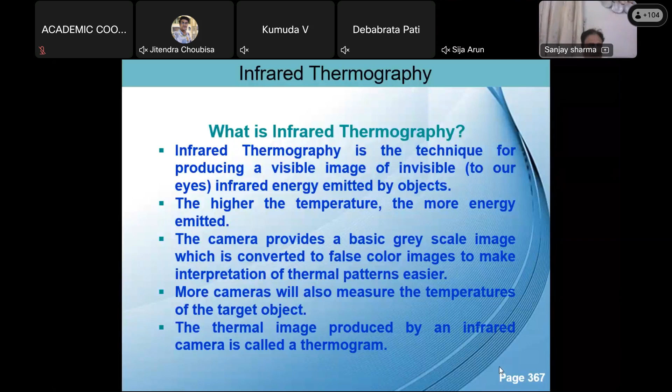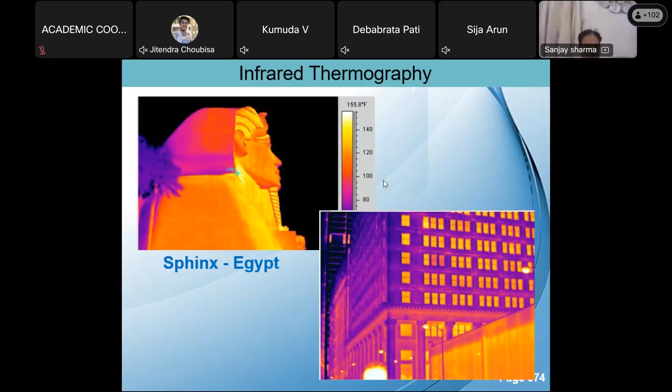This is a moisture meter, basically to find the moisture level in timber, concrete, plaster, etc. Radiography is another thing - X-ray units or gamma ray units, but not very common - you can use them. This is the autoclam, basically to determine the in-situ permeability.

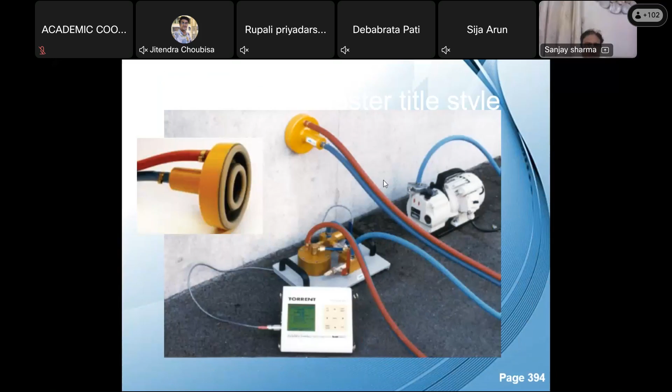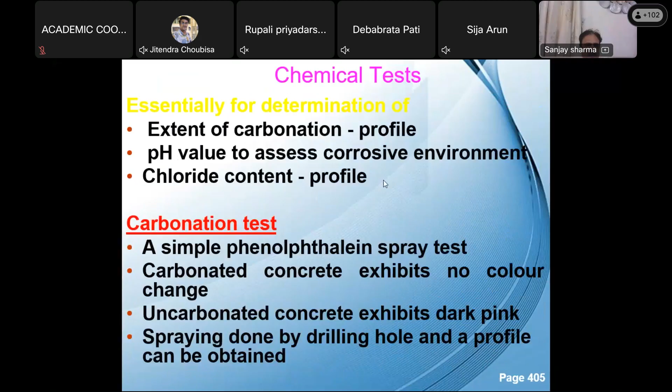Then carbonation test finds out the carbonation level, which is important for corrosion-affected buildings. pH value will tell you that. Chloride content is again important, which you can determine in your chemistry lab. These are the samples basically needed for monitoring of a structure. We need to make a core, Rebound hammer at 12 locations, rebar locator at 2 or 3 locations, Windsor probe at 3 locations, pull-out test at 4, pull-off test at 6, and break-off test.

So you can compare this with medical science also. The orthopedic doctor is your structural engineer, the pathologist is your chemistry consultant, the surgeon is your structural rehabilitation consultant, medicine is your construction chemicals, the stethoscope is your rebound hammer, sonography is your UPV velocity test, and biopsy is your core cutting, etc.

So coming to the conclusion part, I am only speaking - one-way speaking is sometimes not ideal, but let me give you my sense of it. Basically, structural health monitoring AI applications means whatever data you are collecting, you analyze that data through proper technique and formulate a model for predicting what may happen in future for that particular structure.

So in-situ systems are to be strengthened by using these NDT techniques along with visual inspection, and then an overall holistic view about the structure may be formulated. So this is what I will say - structural health monitoring and AI applications along with NDT application are being carried out together.